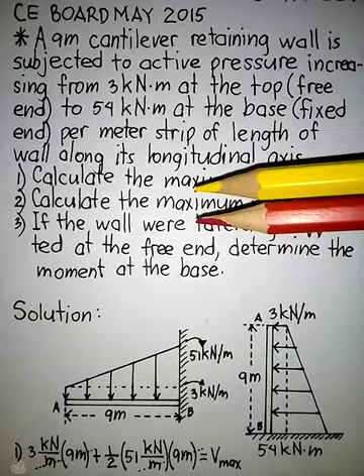Now this time, we will tackle this cantilever beam with a combination of two loads, the uniformly distributed load and the uniformly varying load. But the question is, can we still use the formula that I have invented in this combination of two loads, and will this formula still give us the correct answer? Fortunately, the answer is yes. We can also use this formula in this combination of two loads, both uniformly distributed load and uniformly varying load.

So let us have this problem. In this problem, there are two situations: a cantilever beam with these two combinations of loads, and we are going to compute the fixed end moment without support at free end first, and then second, we will be computing the fixed end moment of this cantilever beam with support at free end. So first without support, and then second with support at free end. So let's have this problem.

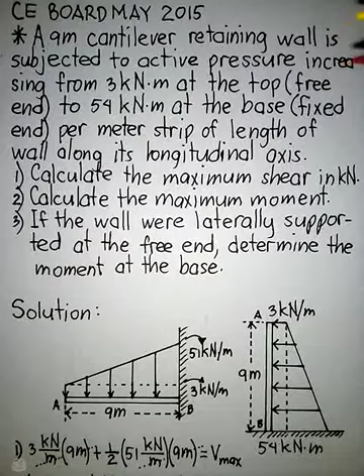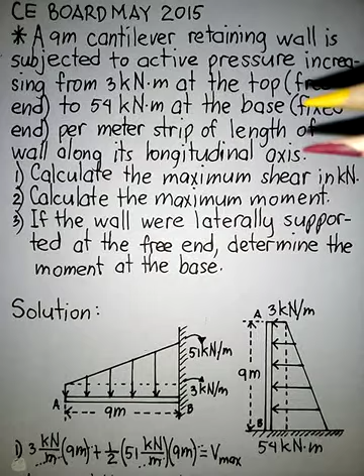A 9-meter cantilever retaining wall is subjected to active pressure increasing from 3 kN at the top free end to 54 kN at the base fixed end per meter strip of length of wall along its longitudinal axis. Number 1. Calculate the maximum shear in kilonewton. Number 2. Calculate the maximum moment. Number 3. If the wall were laterally supported at the free end, determine the moment at the base. So first, we will treat this retaining wall as a cantilever beam per meter width.

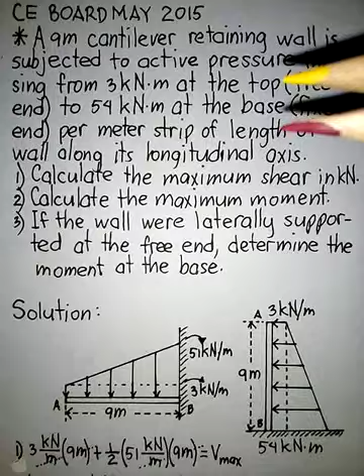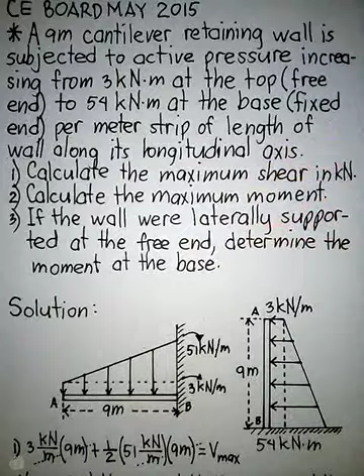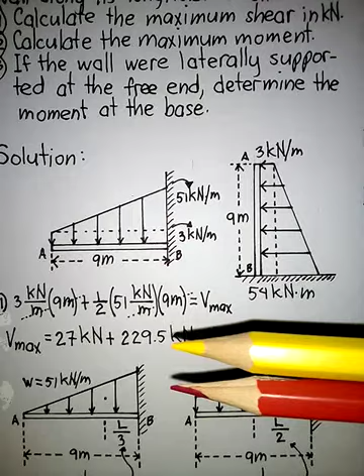So for number 1, we will be computing the maximum shear in kilonewton without support at free end. First, we have to dissolve these two loads into two separate loads. So we will dissolve this first into uniformly distributed load and uniformly varying load. The uniformly distributed load will be 3 kN per meter. The length of the beam is 9 meters. And then we have a point A at the free end and point B at the fixed end. The next one is the uniformly varying load. So 54 minus 3 will be 51 kilonewton per meter at the top and 0 at point A. So the same length of beam, 9 meters.

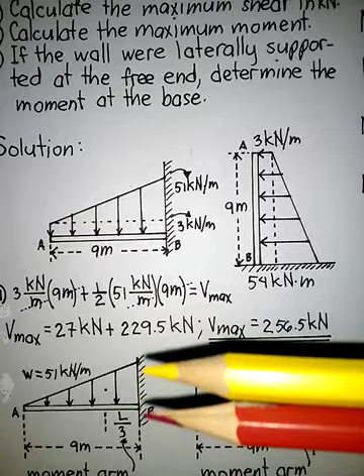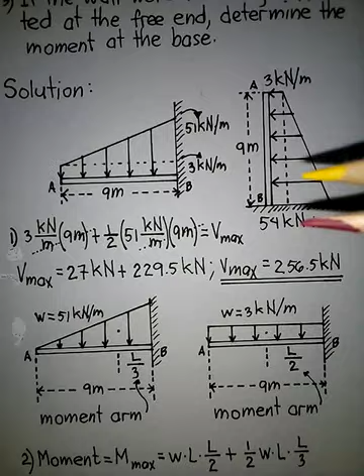To compute for the maximum shear without support at free end, we will just use the usual solution. In computing for the shear of this uniformly distributed load, we will just multiply the length of the beam by the uniformly distributed load. So that will be 3 kN per meter multiplied by 9 meters, and then plus the shear for the uniformly varying load, which will be 1/2 of 51 kilonewton per meter multiplied by 9 meters. So that will be the maximum shear. Using our calculator, this will be 27 kilonewton plus 229.5 kilonewton. So the maximum shear at the fixed end will be 256.5 kilonewton.

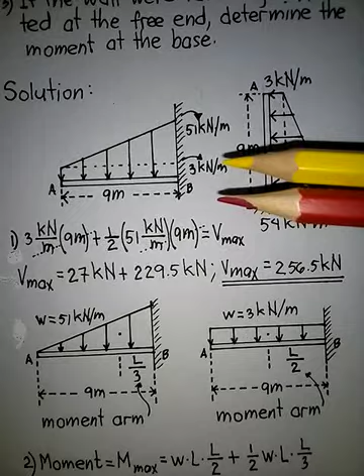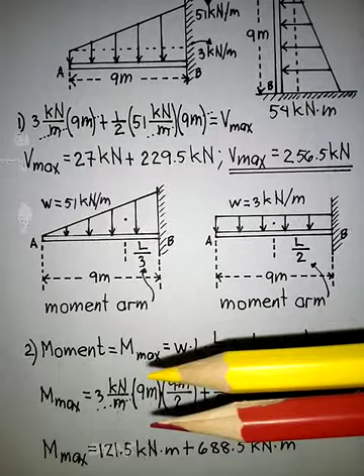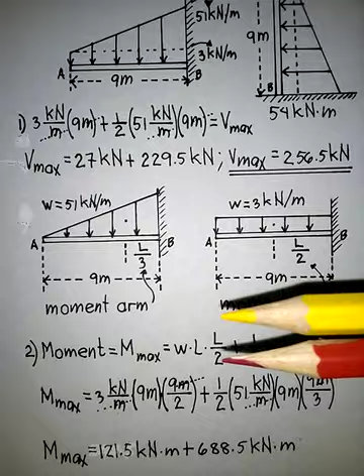Okay. So in number 2, we will compute for the maximum moment at the fixed end, still without support at the free end. To compute for that, we will just multiply the uniformly distributed load by the length of the beam by the moment arm of the load from the fixed end, plus for the uniformly varying load, 1/2 of the uniformly varying load multiplied by the length of the beam multiplied by the moment arm of the load from the fixed end. So that will be 3 kilonewton per meter multiplied by 9 meters for the length of the beam multiplied by the moment arm 9 meter over 2, plus for the uniformly varying load, 1/2 times 51 times 9 times 9 over 3. Simplifying that, we will have 121.5 kilonewton meter plus 688.5 kilonewton meter, and the answer is 810 kilonewton meter. So that is the maximum moment at the fixed end without support at the free end.

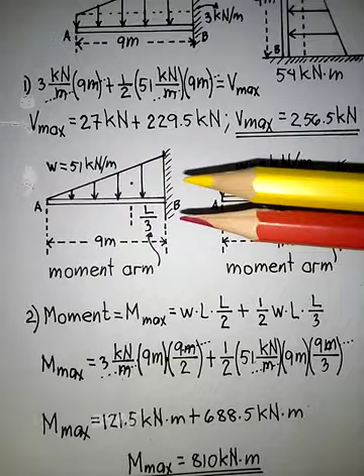Now, in number 3, we will compute for the maximum moment at the fixed end with support at the free end. So first, as we did in our first two problems about a cantilever beam with support at free end, we will draw the moment diagram of the two combination of loads. So this is the moment diagram of the uniformly distributed load, and this is the moment diagram of the uniformly varying load.

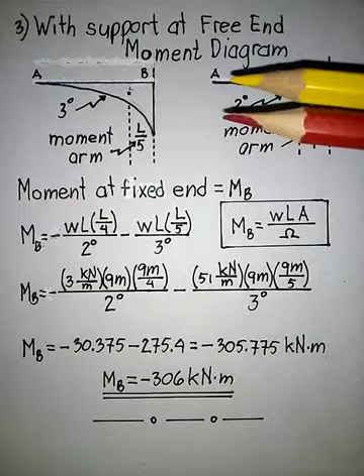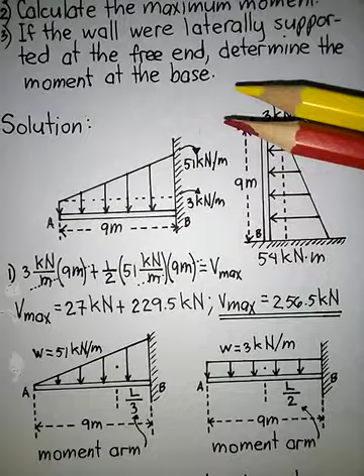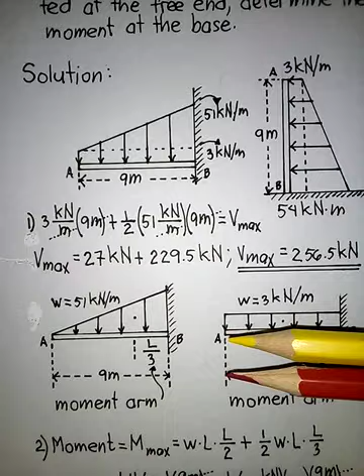As I have said in the first two tutorial videos, there will be a support at the free end, as said in number 3. So there is a support there. The support will be there and it will stay there, but it will not be included in the computation of the fixed end moment of this beam. So the support will be there, but it will not be included in the computation of the fixed end moment. Okay, so what does it mean?

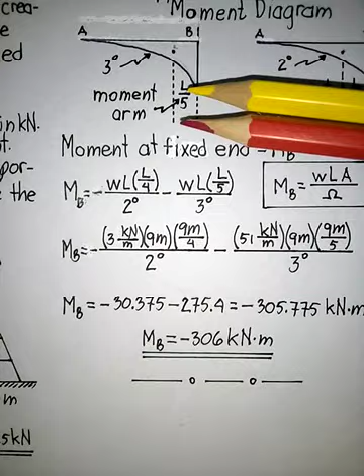So here we will just draw the moment diagram. We will also have to compute for the moment arm of the moment diagram and the degree of the curve of the moment diagram, the same for both the uniformly distributed load and the uniformly varying load.

So to compute for the fixed end moment at the base with support at free end, we will use this formula, a formula that I invented way back in 2018. I have been working on this formula, enhancing and improving it until now, when it was proven to be correct and accurate. So let's use this formula now.

To compute for the fixed end moment at the base with support at free end, a negative sign means the moment is clockwise. So negative W, the uniformly distributed load, multiplied by the length of the beam, multiplied by the moment arm of the moment diagram, which is L over 4, divided by the degree of the curve of the moment diagram for this uniformly distributed load, minus the uniformly varying load multiplied by the length of the beam, multiplied by the moment arm of its moment diagram, divided by the degree of the curve of this moment diagram.

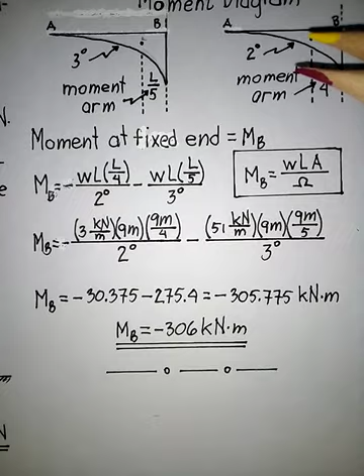So the uniformly distributed load is 3 kN per meter, multiplied by 9 meters for the length of the beam, multiplied by 9 meters over 4 for the moment arm of the moment diagram, divided by the degree of the curve of the moment diagram. Minus, the uniformly varying load is 51 kN per meter, multiplied by 9 meters for the length of the beam, multiplied by 9 meters over 5 for the moment arm of the moment diagram of this uniformly varying load, divided by the degree of the curve, which is 3.

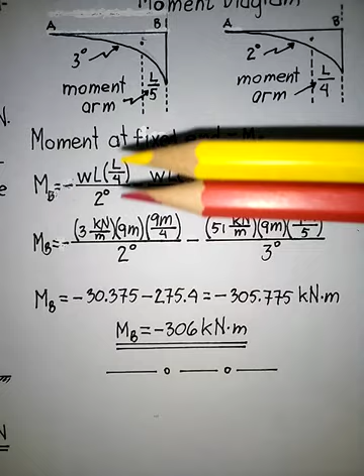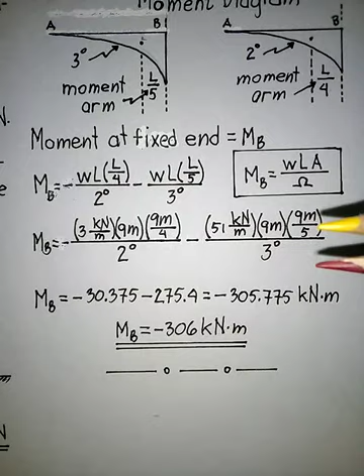So the answer will be negative 30.375 minus 275.4, which is equal to negative 305.775 kilonewton meter, or negative 306 kilonewton meter. So that is the fixed end moment of this combination of two loads with support at free end.

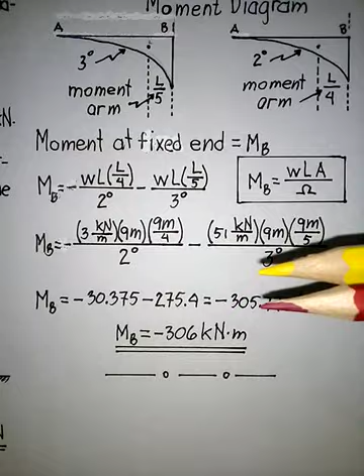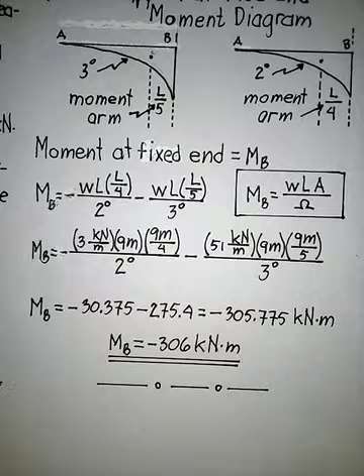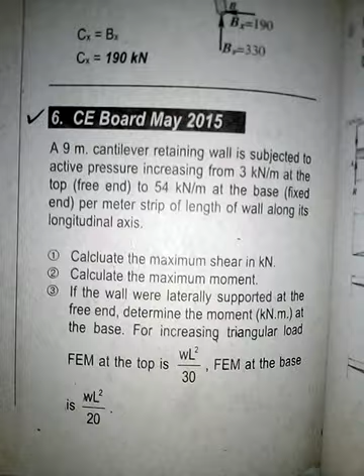Now, to prove to you that our answer is correct and accurate, we will compare our answer to this reviewer book where this problem was taken. So this is the reviewer book. This is the same problem that we have solved, and this is their solution.

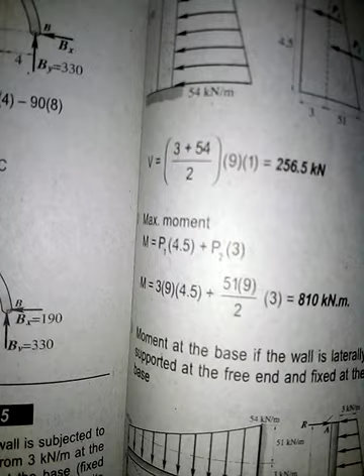We will just focus on the fixed end moment with support at free end. Here we have the same answer of negative 306 kilonewton meter. So it only proves that the formula that I have invented is correct and accurate, because they have the same answer.